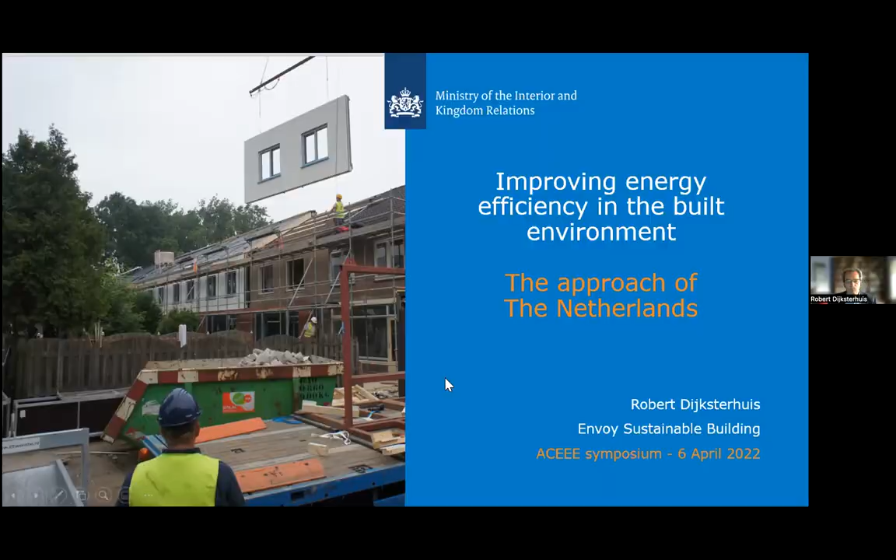So maybe first of all, a very brief introduction on what it is in the Netherlands. So we are quite a small country. We are only 17.6 million people with a high population density. So 90% of our population lives in an urban environment. And this population lives in about 8 million homes, and we have about 600,000 non-residential buildings, like production halls, offices, shops, etc. And we know that between now and 2050, almost all buildings will still be in use. And at the same time, we know that about 90% of all these buildings in the Netherlands have an individual heating system based on natural gas.

I see someone in the chat saying that he's not able to hear me, but I hope that I am heard by others. I can hear you. Okay, then I'll continue.

So there's the challenge we face. So we know that we have millions of buildings, and between now and 2050, when we want to be climate neutral, we have to eradicate about 7+ million individual heating systems based on natural gas. And at the same time, we have a very big housing demand. So between now and 2030, we need to build an additional 900,000 homes. So, well, that's a challenge for you. Can we go to the next, please?

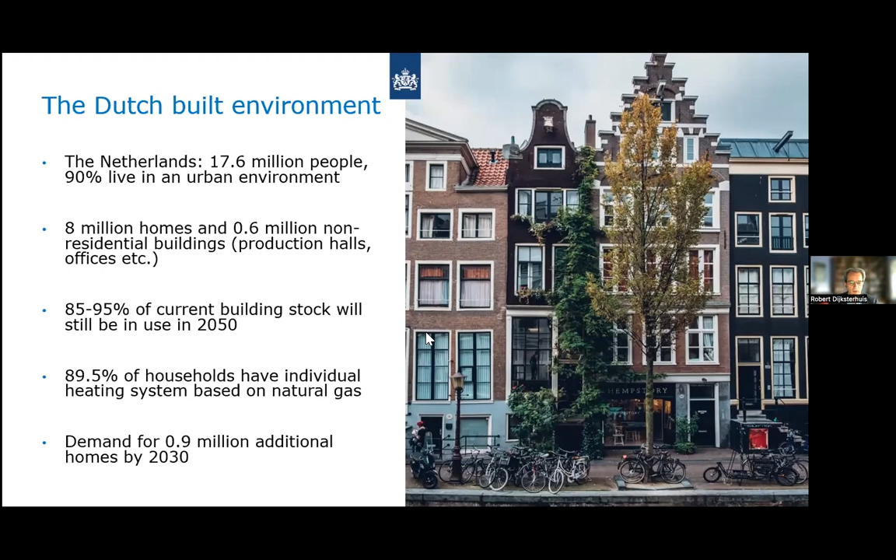So when we're talking about the energy transition, then it's part of the European Union's Green Deal, where we have set the target that we want to reach 55% of emissions reduction by 2030 and become climate neutral by 2050. And we measure that through 3 goals. So one of them, of course, is reducing CO2 emissions, but at the same time, we also measure how quickly we are switching to renewable energy away from fossil fuels.

Your speaker is not working.

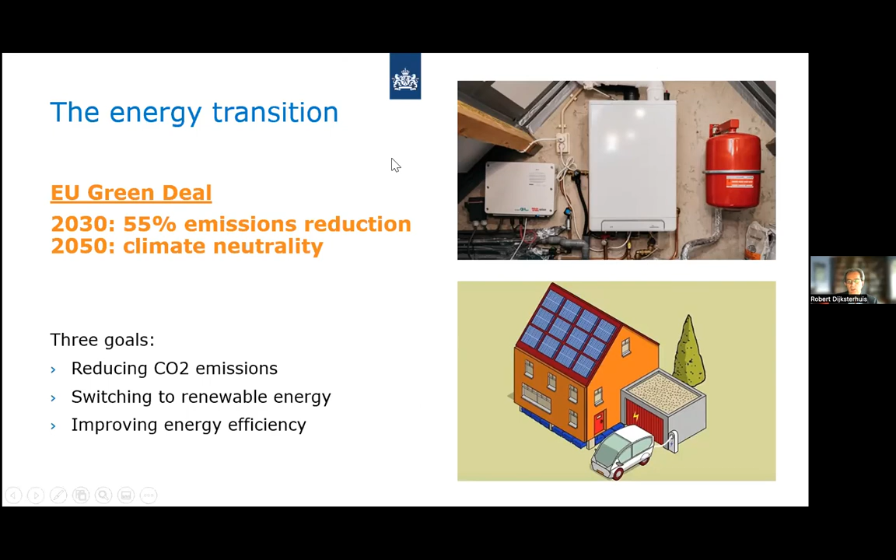And how we are going to improve energy efficiency. So when we're talking about the built environment, then it's basically to change from what you see on the picture on the right side, from these gas-fired heating systems towards new homes with solar panels on the roof, with good insulation, and then other sources of heat. Next, please.

And for that, our minister launched a new program just last week on the 2nd of April, which is called the National Program on Improving the Sustainability of the Built Environment. And this is a 5-track plan, which is combining both a district-oriented approach as well as approaching individual homes. It's also about targeting non-residential buildings, on resource and infrastructure, and on innovation, circularity and adaptation.

And I'll very briefly walk you through what's in the plan and why we're choosing the combination of a district-oriented approach combined with an individual approach. And this is also what you can see on the picture on the right-hand side, that if you are targeting only homeowners, then you get a situation like in the picture that you have two homes which are very well insulated, but the one in the middle said, well, sorry, but I don't have the money for it, or I don't want to insulate right now. And then, well, this is not efficient to make your built environment more sustainable.

Next, please. So first of all, when we're talking about the district-oriented approach, then you have to know that we have asked all municipalities in the Netherlands to draft a heat transition vision a couple of years back already, and they had to deliver that vision at the end of last year. And there they have to indicate per district what the future fossil-free heat supply will look like. So on average, a district will be about 500 buildings.

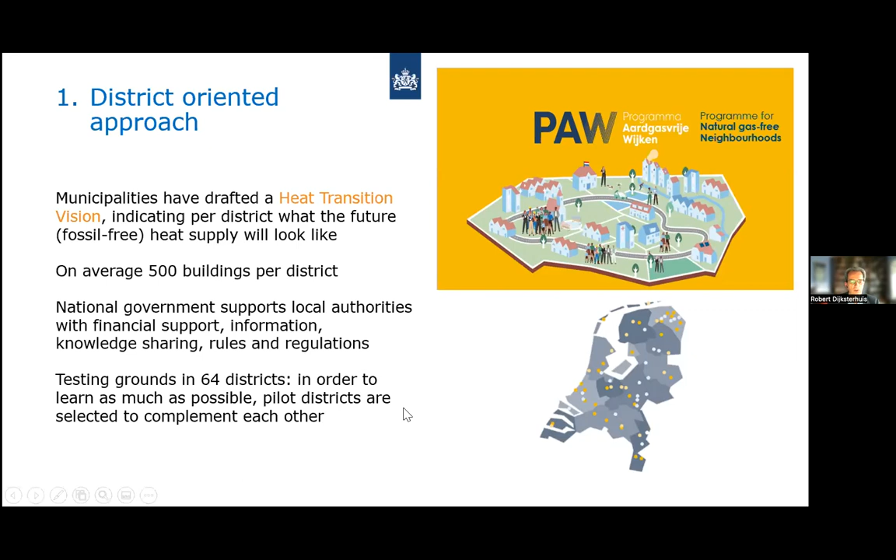And we have started with 64 testing grounds. And you can see them on the map. So all the dots on the map are the different testing grounds where we try to learn as much as possible about all the different kinds of solutions we can offer. Next, please.

And this is combined with this individual approach where we say, okay, well, of course, a homeowner has to invest in energy renovation for their own homes. And for that, we can supply information where we work together with more than 20 organizations. And you can see that on the right-hand side, there's this small clip from a website we have called verbeterjehuis.nl, so how to improve your home.

And you can go there and fill in the characteristics of your building. So to say, okay, this is the age of the building, it's a single family home, or it's an apartment, etc. And then if you fill this all in, then you click on OK, and then you get a list of targeted suggestions on what to do to improve the insulation level and the heat supply for your home, and what measures you can take as an individual homeowner.

For that as well, we've launched a standard for home insulation where we say, okay, well, this is a future-proof standard. So whatever you do, if you insulate your home up to this standard, then you know that wherever your home is in the Netherlands, this is good insulation. So if in the end there will be, for instance, geothermal energy or aquathermal energy or residual heat or whatever, that doesn't really matter, but this is the best level of insulation for your home.

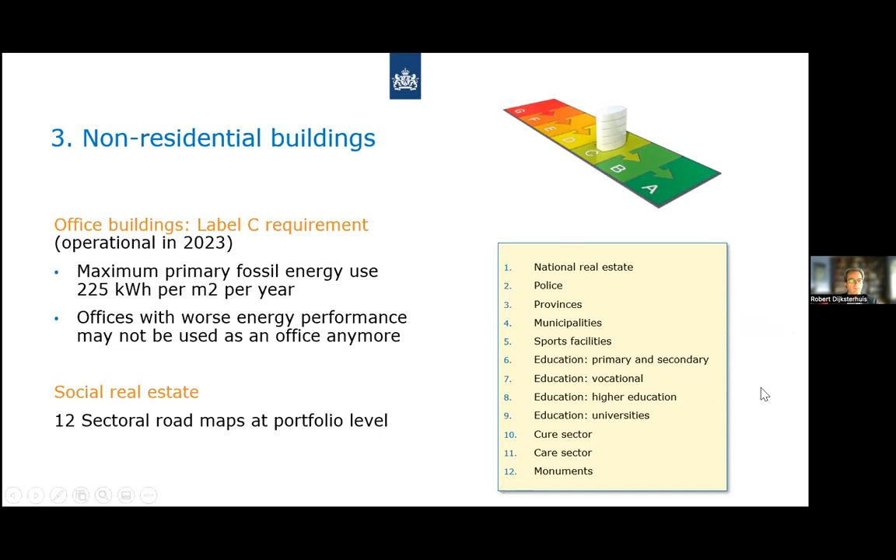So I'm winding up already. Number 4 and 5 of our five-track approach concern resources and infrastructure. If you want to eradicate natural gas, you need good alternative systems. For that, we're investing in a stable investment climate and better preconditions for these sustainable alternatives, which can be an all-electric solution, green gas, aquathermal energy, geothermal, etc. Whatever the business case is best per different district in the Netherlands. We as a government are working together with municipalities and provinces to try to improve the climate and start investing in these alternative heat sources.

Finally, we're investing in innovation, because we see that in the Netherlands, as well as in the rest of Europe, there's a very big demand in the construction sector, and also a shortage of products. At the same time, we need to double or even triple the renovation rate, so we need to improve labor productivity in the construction sector. We need to industrialize and digitize construction, and at the same time pay much more attention to circularity and climate change adaptation. Those are the challenges we face.

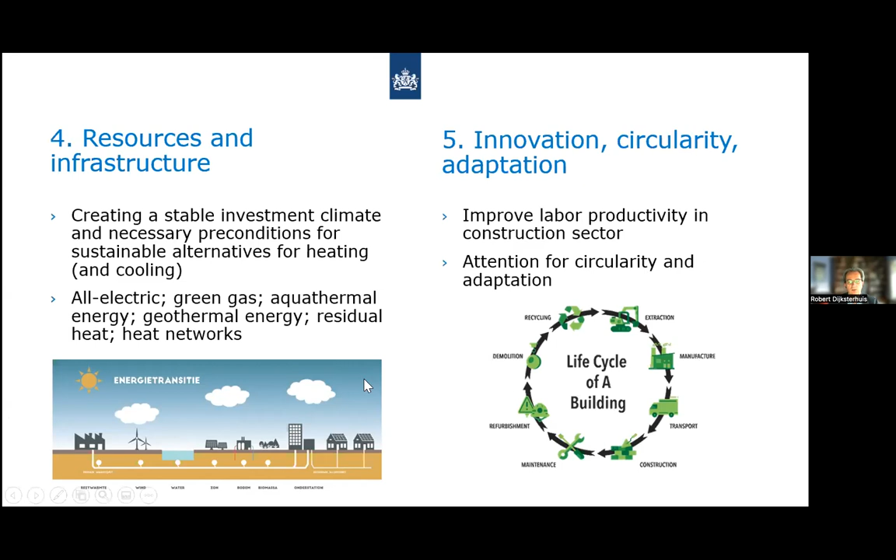Yes and no. They are not fully exempted from taking climate action. We do tell every building owner in the Netherlands that by 2050, your building will be fossil fuel free, so you have to change something.

But of course, what we do note is that for a monumental building, we're not going to change the way the building looks because of insulation measures. So we try to sit down together with the monument owners to see what is possible for this specific building. But they're not fully exempted.

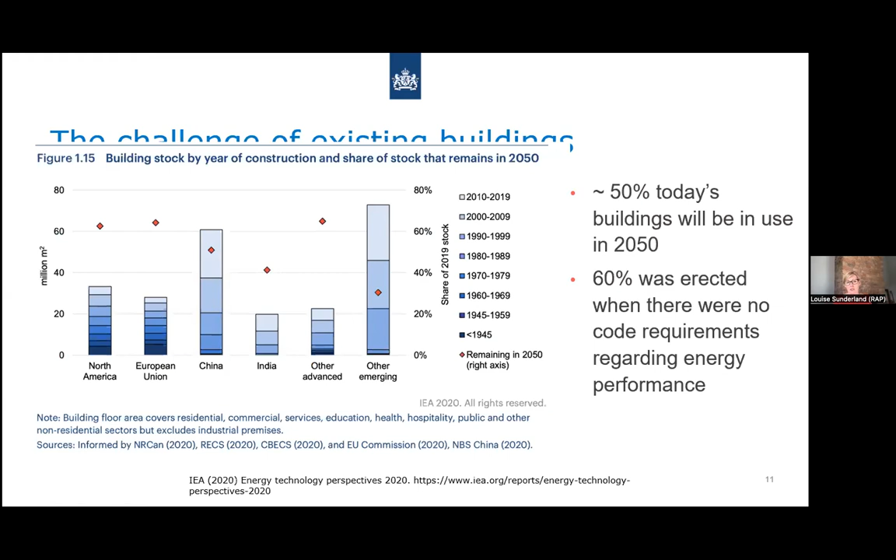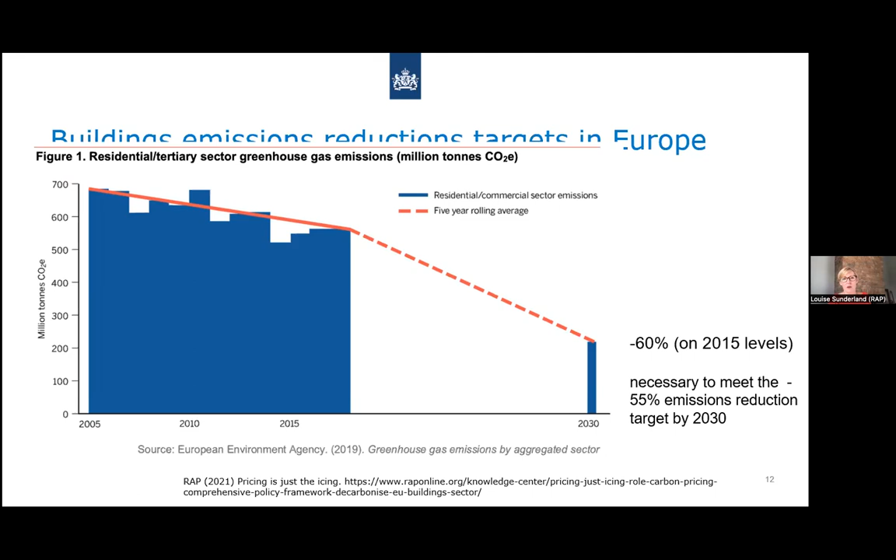This, I think, is the context in which minimum energy performance standards, or building performance standards, come in. What are these standards? Quite simply, they are regulations that require existing buildings to meet a minimum performance standard at a chosen point in time. Sounds simple. They are probably most similar to things we're very familiar with - most similar to building codes. They are quite different to building codes, though, in 2 most important ways.

The first way in which minimum energy performance standards differ from building codes, where building codes extend to existing buildings, is that they apply to the whole building. Very often when our building codes extend to existing buildings, they apply only to the element being renovated or replaced, whereas these standards apply to the whole building and the performance, energy use, or carbon use in those whole buildings.

The second really important area is that they apply even when no building works trigger the application of the code. So they can actually apply to entire elements of the stock, even when there are no building works triggers. Applying to whole buildings and to whole parts of the stock means they're potentially much, much more impactful than building codes alone.

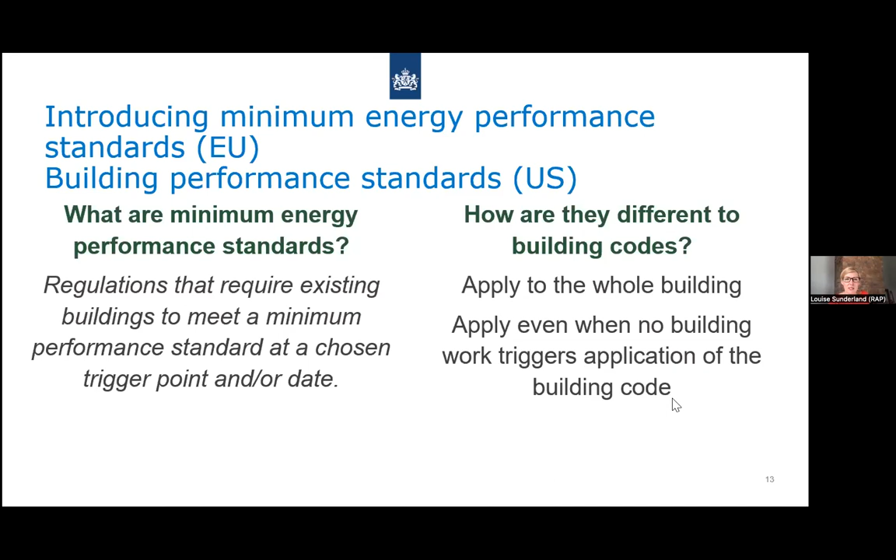Sorry about the slight odd formatting on these slides - it's got a bit weird, but I'm sure the slides are available on the website if you'd like to look at them afterwards. As I've said, these are relatively new standards, with certainly new interest in them being introduced in a number of jurisdictions across the world. I've looked at a lot of them, whether in the US, in Europe, or even some in Australia and New Zealand.

They're all designed in quite different ways, but they all follow this formula. So they identify the target buildings. And actually in different jurisdictions, you see quite different sectors of buildings being targeted. For example, the new US building performance standards tend to go for the big emitters, looking at big commercial buildings, or some multifamily buildings. Whereas in New Zealand, Australia, and a lot of the standards in Europe, they're looking at homes, setting a minimum energy efficiency decency standard for homes. So you can see they're addressing different sectors for different reasons.

Then they identify the standard to be met, and very importantly, the metric used to define that standard. That could be either a carbon standard, CO2 per meter squared per year, or an energy performance standard, kilowatt hours per meter squared per year, as we've already heard Didier talk about with the example in France.

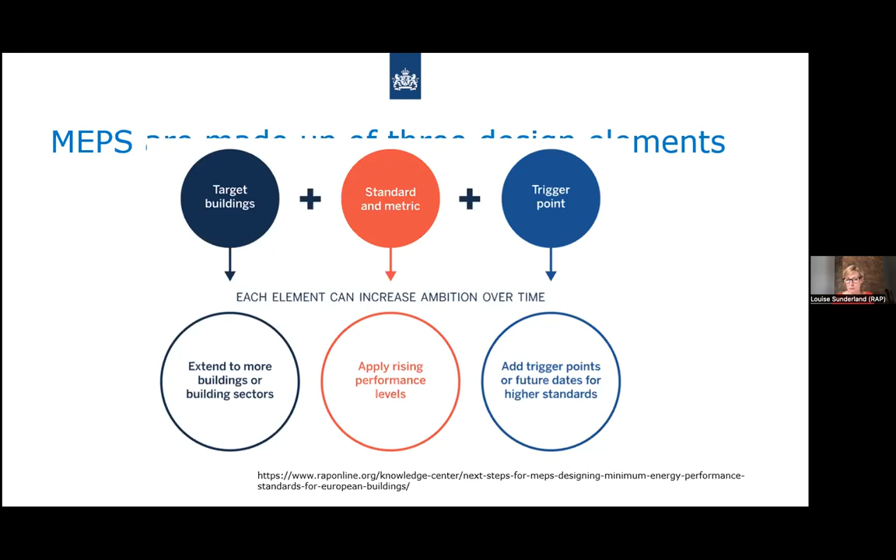And then of course the trigger point comes. All of the standards I've seen have a firm date by which the buildings in the targeted sectors need to meet the standard. Very often there is a phase-in period before that firm date, whereby a trigger point in the building life cycle is used. So you might have a standard introduced, and only buildings being sold or rented out under a new contract are required to be renovated to meet the standard for the first, say, 5 years. Then there's a firm date whereby all those buildings, even if they haven't been sold or rented in that period, must meet the standard.

So to make this come to life a little bit, some examples - I've chosen examples here from Europe, from the 3 countries leading the scorecard: France, the Netherlands, and the countries of the United Kingdom. You can see the standards are targeting different buildings in different countries, targeting both non-domestic buildings and homes.

And you'll see in all the examples I've chosen, they're using an EPC level - this is the Energy Performance Certification system across Europe. So if we go to the next slide, I'll pause briefly to explain to those who don't know what that is.

Clearly, as I've mentioned, having a metric that's suitable to define one of these regulations is absolutely essential. So having a metric and some data is really important in underpinning the ability to introduce these regulations. Across Europe, we have the European Energy Performance Certificate Framework, which is a building assessment and labelling framework. It's required by the Energy Performance of Buildings Directive, and member states design and implement it at a national level.

The assessment is required when buildings are newly built, sold, or rented out. The label has an easy to communicate A to G rating, a bit like an appliance energy efficiency label. Underpinning those A to G labels is usually an energy performance band, a kilowatt hour per meter squared per year band. However, I'd say that while these are required for all European member states, they're not harmonized, which means countries introduce the assessments and labelling frameworks in different ways.

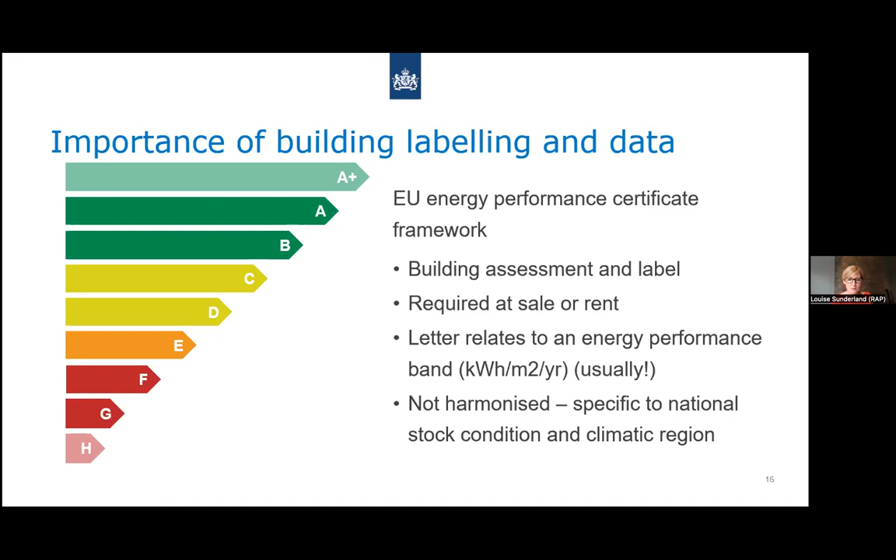So just to say, these standards are not all completely comparable on their letter, the EPC letter used. So very briefly running through, in the Netherlands, we've already heard there's the EPC C label for offices. In France and actually in England and Wales, they've taken very similar approaches, which is to target the two worst performing bands, the Gs and the Fs, and require them to be renovated to the E label.

That standard is directed at homes. And then, fallen off the bottom of this, but we mustn't forget it, is a really interesting standard, not yet regulated, but introduced in a new buildings strategy from Scotland. They are proposing that all homes be EPC label C. And what's so super interesting about this standard is that it's being introduced hand in hand with a proposal to phase out the use of fossil fuel heating, using an energy efficiency standard as a precursor to enable homes to be fully decarbonised through the phase out of the primarily gas boilers used in the country.

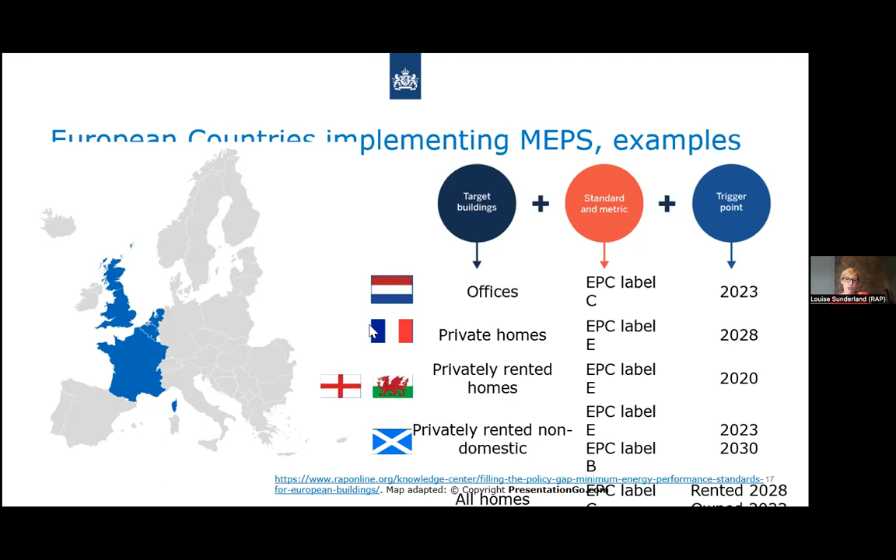And really, I think perhaps the most exciting news that we have at the moment in Europe is that there's a proposal currently being negotiated that would mean the extension of these minimum energy performance standards to every country in Europe. This is a proposal originally published in December last year by the European Commission, and it's currently under negotiation by policymakers.

A quick summary of the proposal is that it follows the approach taken by France and England and Wales, addressing the worst two performing bands, the Gs and the Fs, and asking them to be renovated up to E, with slightly different timelines for domestic and non-domestic buildings, but by the early 2030s. Really importantly, this is going to apply to all buildings, domestic and non-domestic, with slightly different timelines for the two.

Another very important part of the proposal is that it's also based on some level of harmonisation of the EPC scales. Member states will be required to all use the A to G scale and to classify the 15% worst performing buildings as Gs. So you can see from this harmonisation the level of ambition we're pushing for with this standard, which may see anywhere between 15 and 30% of the worst performing European buildings renovated to this E standard by the early 2030s.

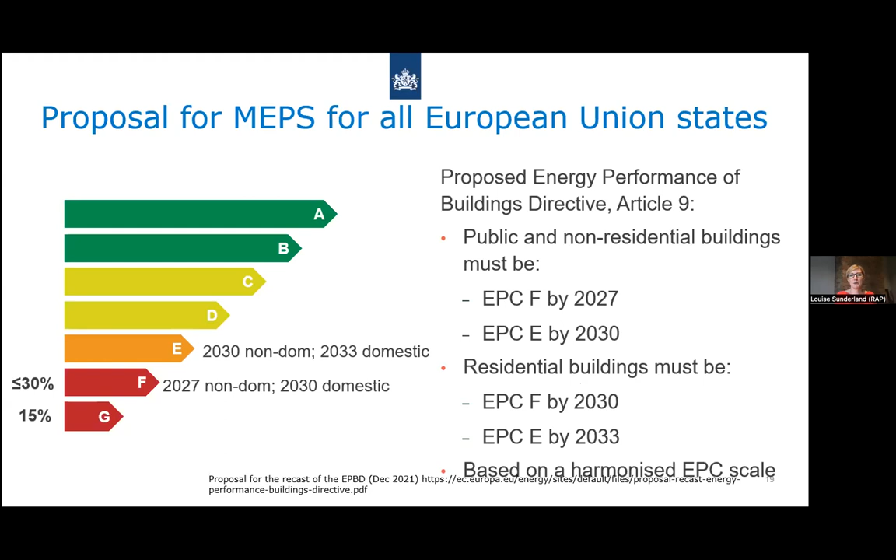As yet, we don't know exactly what that E standard might be. That will be different for every country, due to climatic and stock condition reasons. So this is the big news at the moment, and it's currently under negotiation.

Just to say that I really do think these policies are very, very important. As we've seen in the front-running countries from the scorecard, the standards being adopted by ambitious countries would be very significant if introduced across Europe. However, they are not the silver bullet alone. Regulations, I think, are important. They're very clear signals, and I think we need these clear backstops right now, but they don't make successful renovations happen at the building level. So it's clear that within the Buildings Directive and within national frameworks, there are a lot of other elements that are needed.

I've already talked about the importance of building assessments, building labels and data, but also in the directive, we see a big focus on technical support and financial support to building owners to get the renovations done, to get them done well, and to get them financed. Also, a huge focus at the moment in Europe on safeguards to make sure these renovations don't become extra burdens on households already suffering from energy costs and housing costs. And of course, as both Robert and Didier mentioned earlier, the effective enforcement of these standards will be absolutely essential to their impact.

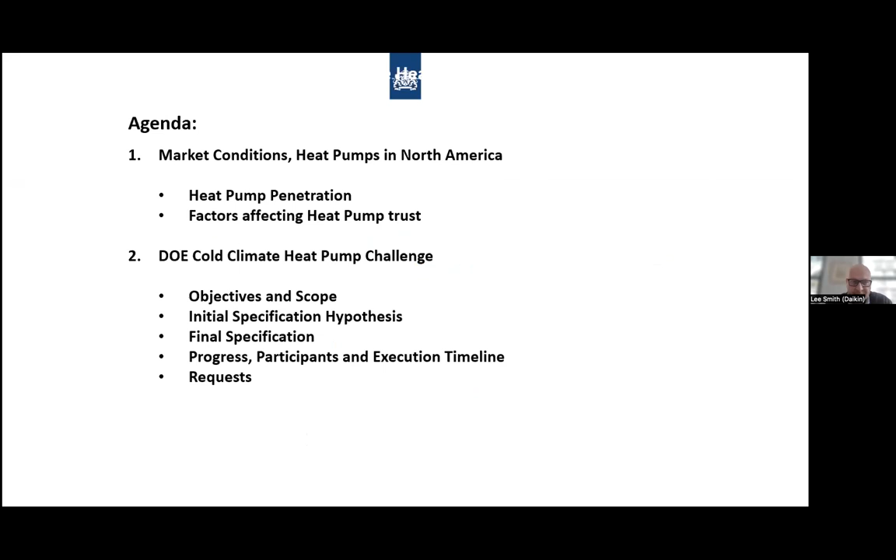From the insights that we collect in our daily activities, there's essentially a lack of trust from dealers to promote heat pumps. And this stems from technologies that have long since been replaced, but also there's challenges in dealing with load calculations relative to the heating side of systems. And there's also challenges in articulating the real running cost, operating cost benefits over the life cycle of the equipment when compared to traditional natural gas-based solutions. Next slide, please.

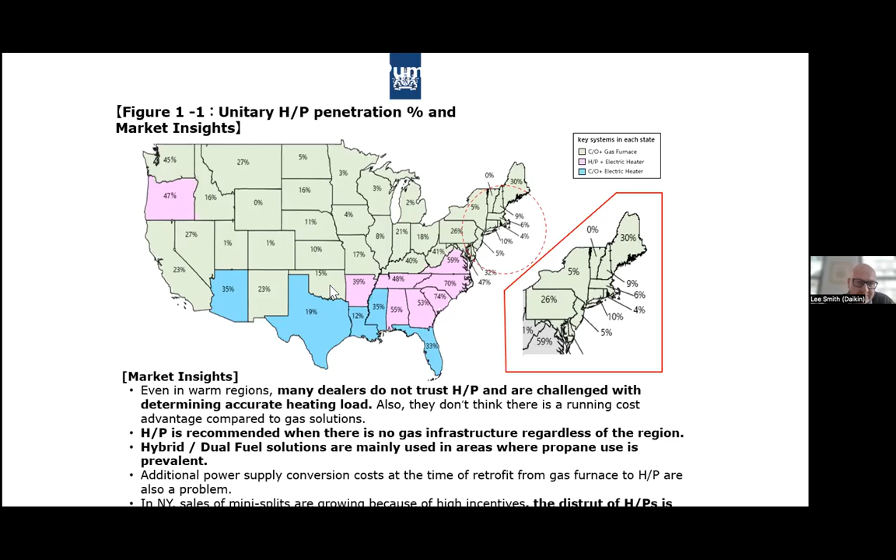As you go to the colder climates, this ratio is increased by more than 2.5 times. In the worst case, up to 3 times that of the cooling load is the calculated heating load for cold regions. So the heat pump capacity is often seen as being insufficient to meet the load and the needs of the home. Next slide, please.

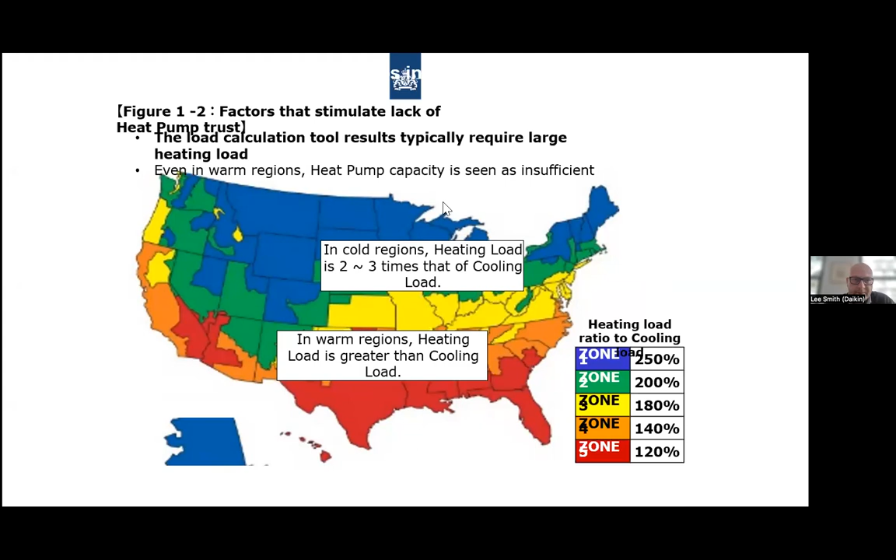As a compound to this, the most common solution used in the marketplace today are what we would call non-inverter compressorized systems. This is a compressor that switches on and off in accordance with the load. And the way that those systems are typically configured into homes is to use electric heat. That electric heat is there to provide a means of emergency heat if the heat pump is not operating, or supplemental heat if the heat pump doesn't have the necessary capacity to meet the load of the home on the worst case days of the year, shall we say.

What we actually see is the deployment of those electric heaters often doesn't take advantage of the capability of the heat pump that's installed. So what homeowners see and what dealers hear about is, my system is costing me a lot of money to operate. And that's because it's not operating as a heat pump where you would see that normal 300, 400% efficiency. It's running as an electric heater, so your efficiency is essentially a COP of 1.

This is compounded in colder regions where the cost of electricity is 4 to 6 times higher than gas. And gas prices are particularly low in the Midwest, the Northeast. So even trying to move people towards the idea of hybrid or dual fuel solutions, leveraging both heat pumps and gas furnaces on the same system, can often have very little merit.

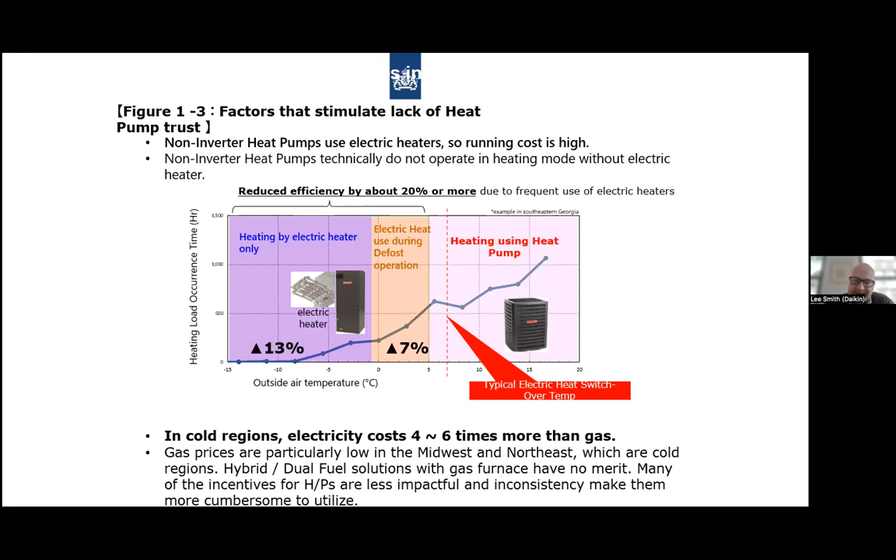Many of the incentives for heat pumps are less impactful, and the inconsistency from location to location in what those metrics are to realize the incentives makes them quite cumbersome for dealers to holistically utilize as well. Next slide, please.

So the purpose of those slides was really to set the scene and to applaud the DOE for recognizing that there is a need to stimulate market transformation towards heat pumps, especially in cold climates, but more so across the length and breadth of the country. So the objective of the Cold Climate Heat Pump Challenge is to accelerate the development and then the deployment of cold climate heat pump technologies.

So the goal is to work collaboratively between the DOE and heat pump manufacturers to develop these solutions, validate the performance, not just in the lab, but also in the field, launch pilot programs with key partners such as utilities, etc., and ultimately to identify and alleviate installation challenges associated with heat pumps today.

The scope of the challenge is focused on centrally ducted electric-only heat pumps that perform better than today's products. The targeted capacity range is from a nominal 2 ton of capacity up to 5 ton, which represents the pretty common equipment capacities that are used in homes today. The systems must comply with all applicable federal and state standards.

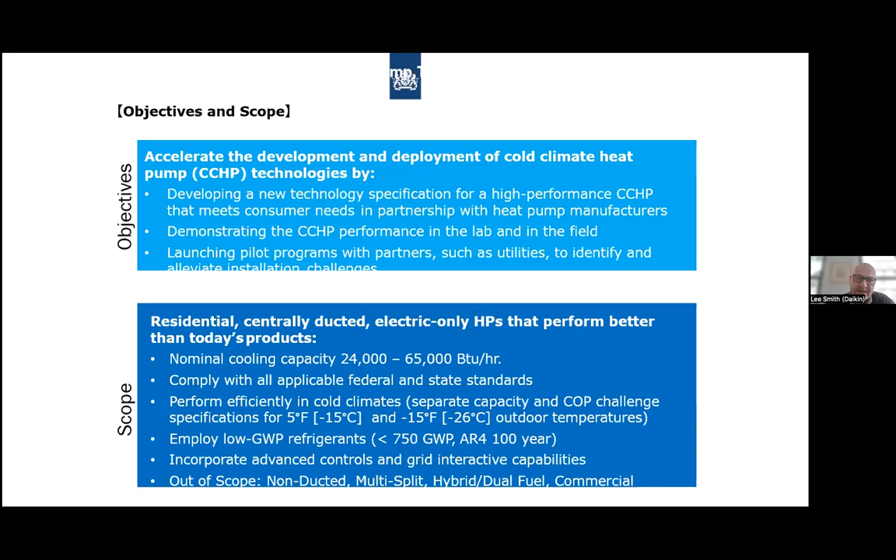The first challenge is to basically meet a heating requirement of 5 degrees, and that the nominal capacity of the system can be maintained all the way down to 5 degrees. So if your system is a 48,000 BTU system, a 4-ton system that has a nominal heating capacity of 54,000 BTUs, you must still deliver that 54,000 BTUs at the 5-degree point. But the goal was to have a COP of 2.8 at 5 degrees.

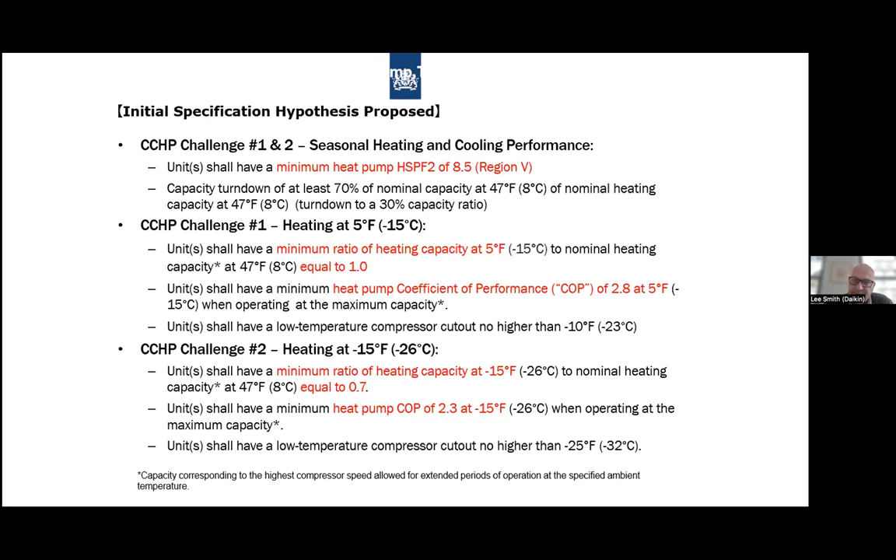What this particular specification also requires is that because of the variable capacity requirements for capacity turn down, the systems that will be developed will all be inverter or variable speed based systems. So this is a very important kind of market development to modernize the types of air source heat pumps that are being more widely deployed into homes in North America. Next slide, please.

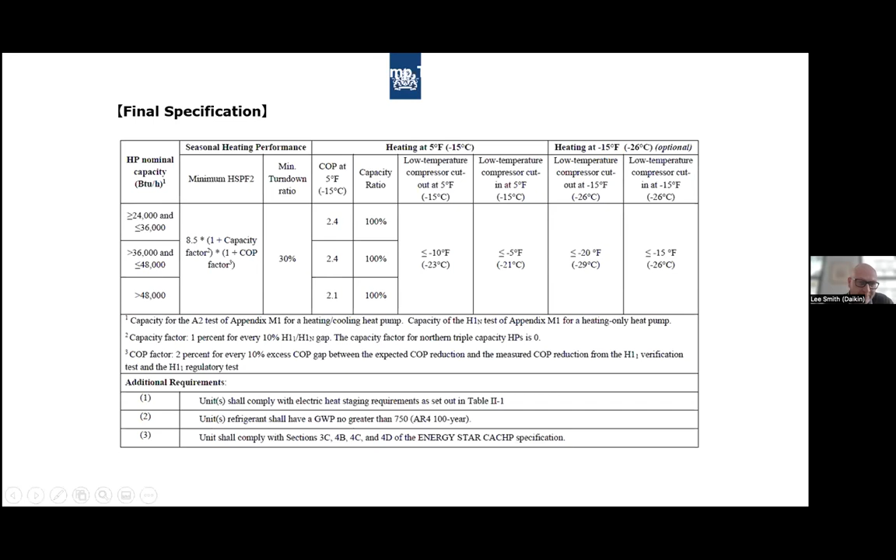One of the key challenges with not just heat pumps, but all air conditioning systems is controlling the quality of installation. So aligned with Energy Star, the Cold Climate Heat Pump Challenge is requiring installation capabilities to be maintained as well, such as validation of refrigerant charge, airflow, fan power draw, automatic system discovery and programming, and then communication capabilities for consumer alerts, energy reporting, and demand response integration as well.

So what this is doing is it's really systemizing the heat pump solution, taking into effect the fact that the thermostat, as well as the actual heat pump itself, need to work in tandem with one another. When you decouple, which has been the case in the past, you lose a lot of inherent opportunities to improve user experience, system performance, and ultimately system efficiency. Next slide, please.

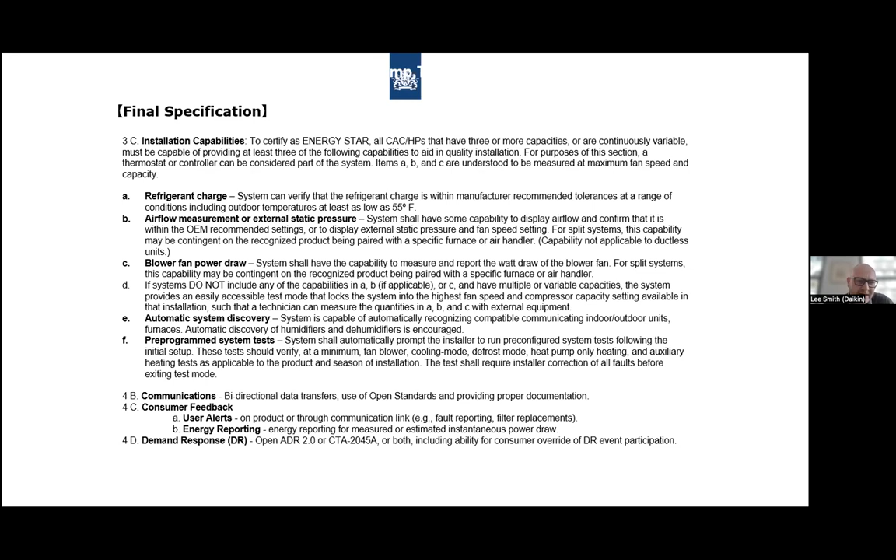I don't know what's happened with the formatting of these slides. I have the same issue.

But JCI, Lennox, LG, Midea, Mitsubishi, Rheem, and Trane Technologies are all active participants in this challenge. Everybody is now working on developing their prototypes, and will work on lab testing and field testing later this year, with a goal to deploy these solutions into the marketplace around the end of 2023, the beginning of 2024. So a very exciting timeline, a very exciting challenge, and lots of great participants as well.